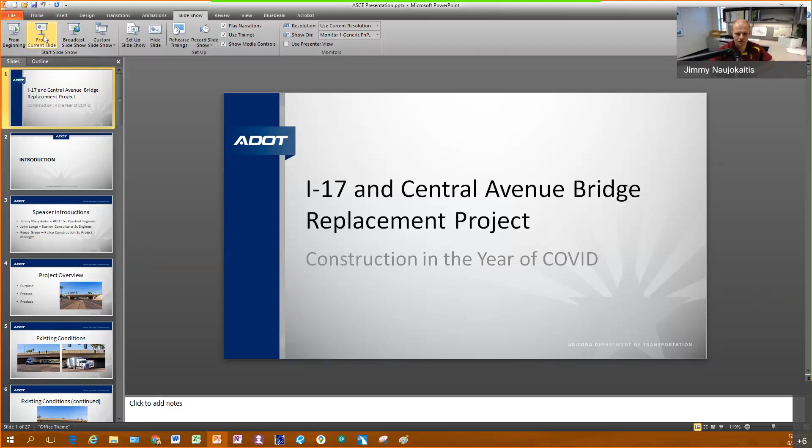Jimmy, I believe you should have screen sharing. All righty. All right, everyone see that? Yep. All righty. Now I got expectations that it's going to be a good presentation, like Joe said. Okay, well, at least for my part, I'll give it a shot. John and Reece won't have an issue.

So, yes, like we said, this presentation is about the I-17 and Central Avenue Bridge Replacement Project, and we're subtitling it Construction in the Year of COVID. So we'll explain that a little bit as we get further on into the presentation.

Kind of brief introduction. We already had our intros. So myself, Jimmy Naujokaitis, I'm senior resident engineer over here at the Black Canyon Field Office for ADOT. John Lange, he was the primary bridge designer for Stanley Consultants, and then Reece Green is the senior project manager for Pulice Construction on this project. You'll be hearing from them later in the presentation.

All right, so I'm just going to provide a brief, quick overview because I know you guys don't like owners droning on and on about their projects. And also John and Reece's stuff is far more interesting than what I've got to talk about. So real quick, the 3 Ps for this project, something I came up with late at night.

The purpose of this project is to replace this structure here, the existing I-17 and Central Avenue overpass, which was about 63 years old. So it's to replace that with a new, quote unquote, state-of-the-art bridge to not only facilitate traffic on I-17, but also to account for the future light rail expansion in the area.

The process is a phased bridge construction where we would demo and rebuild the bridge one half at a time. Because I didn't realize this, but apparently you can't shut down a major interstate freeway in a major metropolitan area for 8 months. But they told me that was not a good move to make. So I was like, okay, all right, I'll let you guys make the decision. Turned out very well. So glad they didn't have me consulting in that end at the beginning.

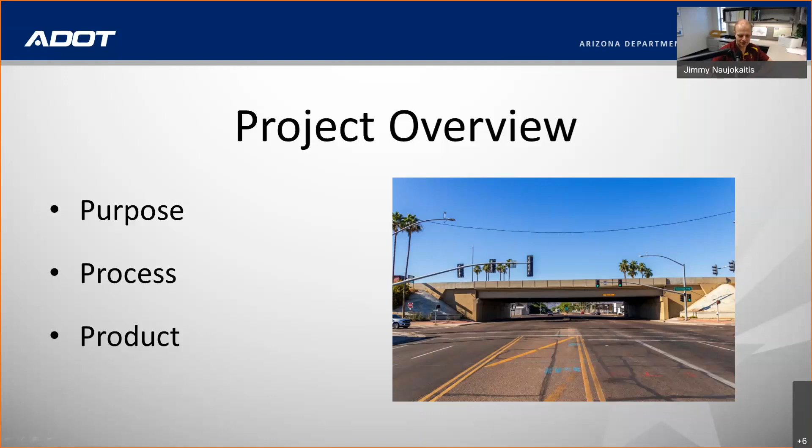And the product is, as you will see, a modern 3-span steel bridge over Central Avenue, allowing for maximized clearance underneath for both light rail and heavy truck traffic, as well as providing a conduit of traffic over Central Avenue for I-17. So I'm just going to kind of show some of the existing conditions.

One of the big things that we wanted to get away from, and one of the big reasons why we replaced this bridge is, as you can see, the 13-foot 11-inch clearance. This is one of the lowest clearance bridges, I believe, on the ADOT system.

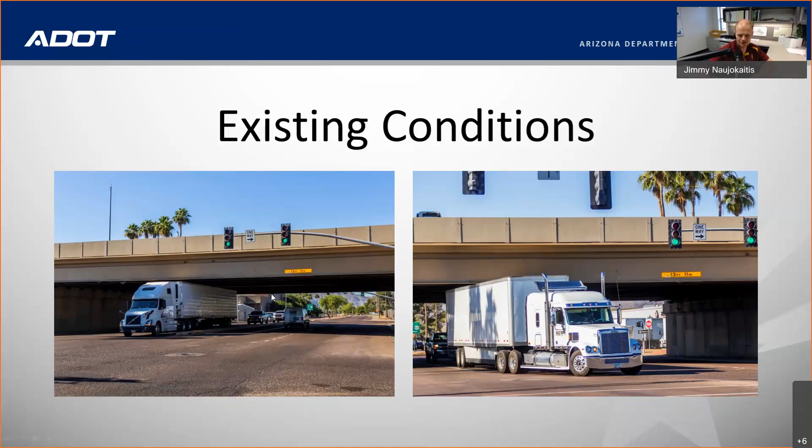A lot of the bridges along this corridor are fairly low clearance. I think 16th Street's about 14 feet. Either way, this was one of the lower ones, so we wanted to make sure, as you can see, the large truck traffic in the area, very low clearance. We had a bridge rehab project probably about 3 or 4 years ago to straighten out some of the girders in that area that had been hit, so it was an ongoing issue.

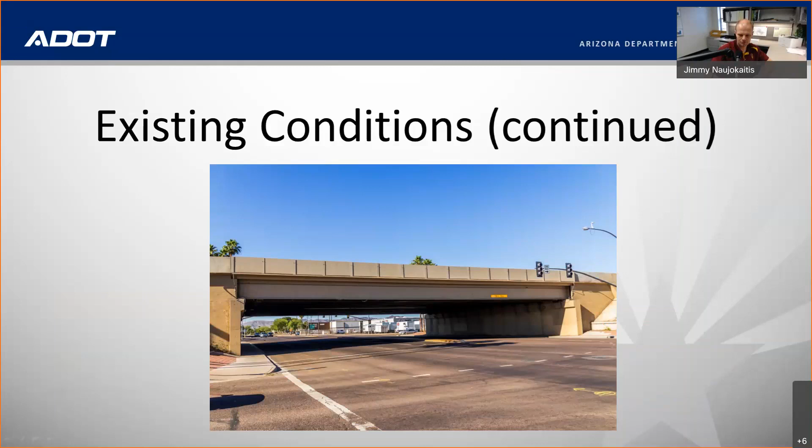You can see some more existing conditions. It was a single span bridge. John will get into that a little bit further in the presentation as to why this existing bridge was a single span, and why our current bridge has a single span across Central Avenue, but in the 3-span manner.

This is showing a little bit at the start of the construction, some of the initial phasing work that we were doing in the median.

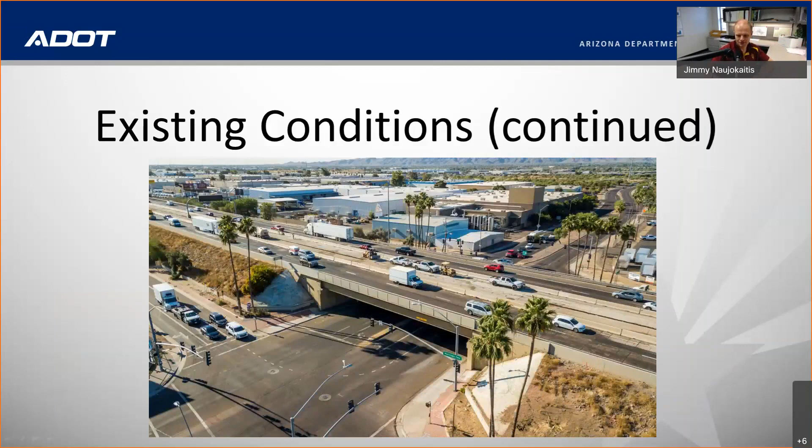As you can see, small footprint area, single span, low clearance on the bridge. That was one of the biggest reasons why we wanted to replace this bridge at this location.

Just really quick, for the project, the programmed amount was $20,440,000. Contract time was 565 days, and the contract was awarded to Pulice I believe in March of last year.

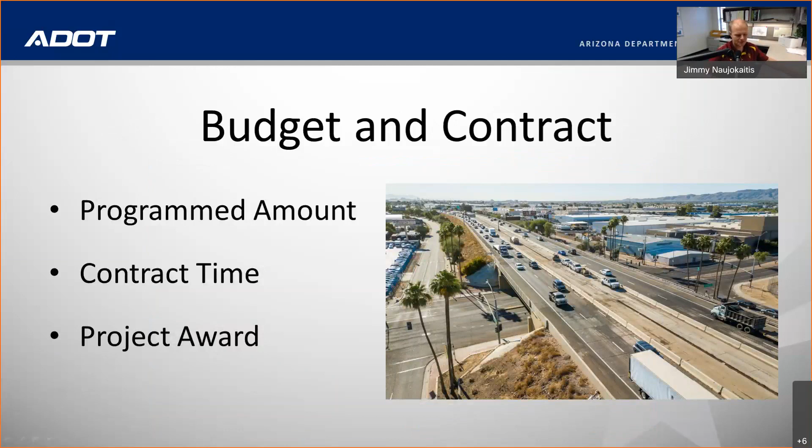All right, so that's the project development. I will hand this off to... stop sharing. Pardon me, I'm not too familiar with WebEx, but now I will attempt to pass this off to Mr. John Lange, and he will continue with the design side of this project.

It's a great thing, this whole thing is going to be captured on video, so I can see years from now how terrible my presenting skills were. But hopefully all my jokes landed. I can't hear any of you laughing, but I'm imagining you were all laughing hysterically. They were great. Let me see if I can get this going here.

All right, can you see my screen here? Yep, great picture. All right.

Like Jimmy said, I was the lead structural engineer for Stanley Consultants on this project. Just one second, let me see if I can get this. Okay, there we go.

Like Jimmy said, we had an existing single span bridge. This is a rendering of what the final product is to look like.

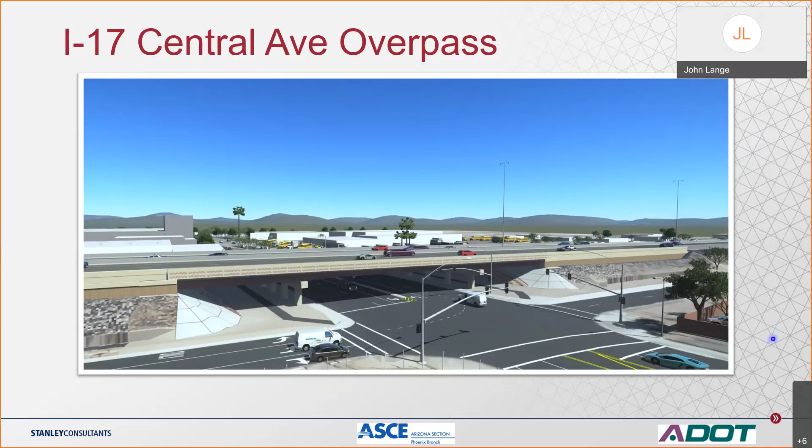When we started the project in phase 1, the DCR, it was based on the Maricopa Association of Governments I-10, I-17 corridor master plan, or spine study. I kind of refer to that as the wish list for I-17. It's the ultimate build out.

Close to the end of the DCR phase, the project was reduced to the auxiliary lane concept, and instead of the ultimate configuration, we're adding auxiliary lanes to each side of I-17, to account for future widening.

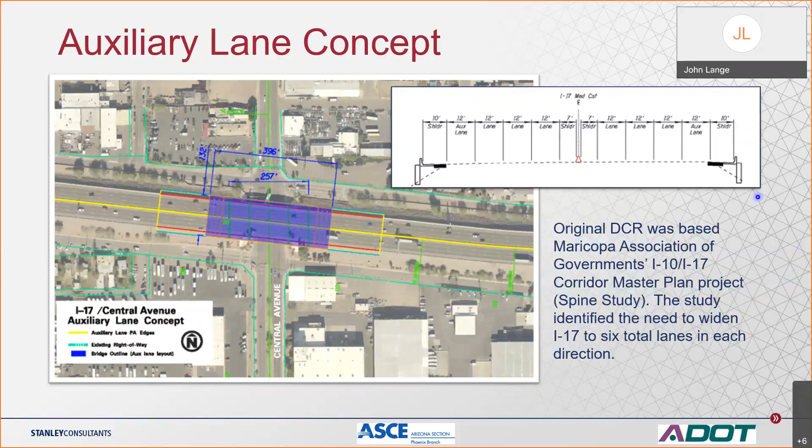Some of the project goals were to replace the existing aging I-17 Central Bridge. The bridge was fairly old, reaching the end of its lifespan. It had gone through a number of repairs and upgrades.

We needed to increase the vertical clearance, like Jimmy said. Valley Metro was planning to extend their south central light rail through this area soon, so that's why this project was moved up a little bit.

We needed to minimize the structure's depth. Like Jimmy said, the existing bridge was a single span, which resulted in a fairly deep structure depth, so we needed a bridge concept that minimized that. We also had a goal of improving the turning movements and sight distance for traffic along Central Avenue.

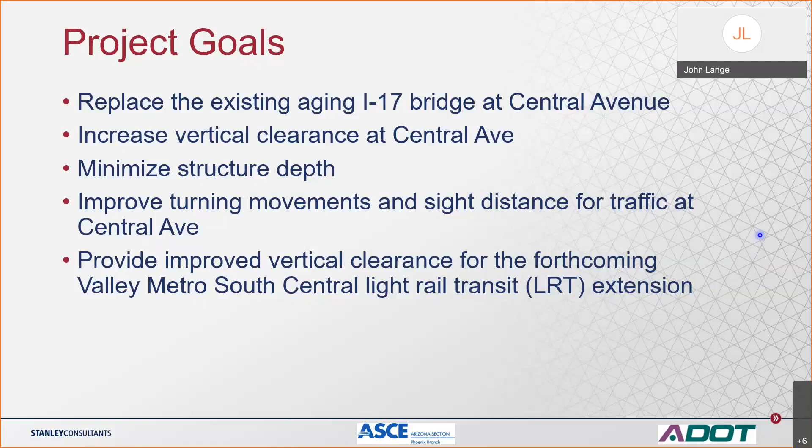This is just a graphic showing the extension for the Valley Metro Light Rail South Central extension. You can see our project location, and they are hoping to have their rail done through there by 2024.

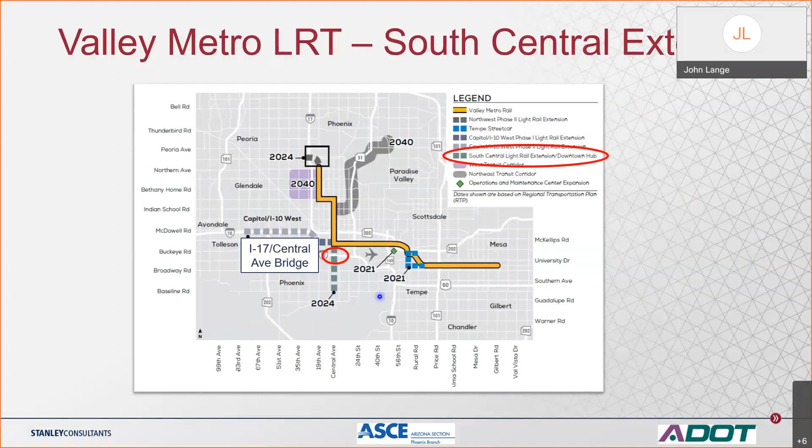The existing overpass, like Jimmy mentioned before, was about 60 years old, built in the early 1960s. It was originally independent northbound and southbound bridges, and the median infill was completed around the end of the 80s. It's a single span steel plate girder bridge, approximately 122 feet long by 113 feet wide.

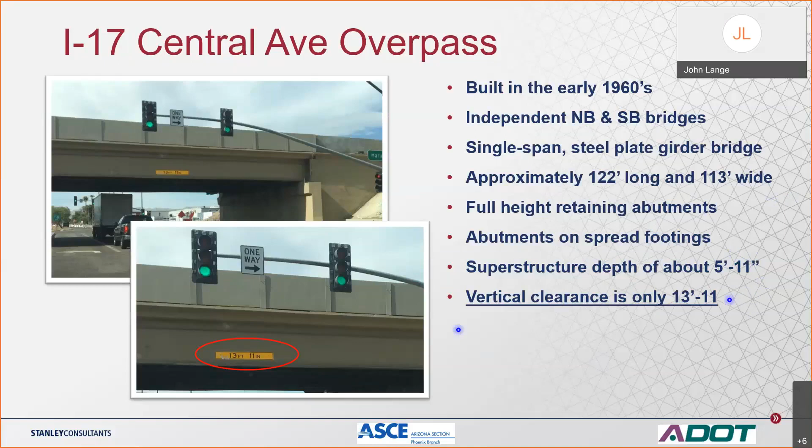It has full height retaining abutments, which proved to be a little challenging, especially for Pulice in constructing the new bridge. The abutments were on spread footings. The superstructure is about 6 feet deep, and the vertical clearance, a key issue here, was 13 feet 11.

Here's a couple photos of the existing underside of the bridge. You can see in this photo these are post-tensioning rods that were actually added to the bridge shortly after it was constructed to help improve its live load capacity.

This is the center or middle girder that was added for the median infill project. I don't know how well it shows up, but you can see it's slightly deeper here, with kind of a taper to it.

And these little birdies here remind me to point out that if you've ever driven under I-17, you know there's a pigeon problem. You can see some of the bird netting installed there, and that will be replaced on the new bridge.

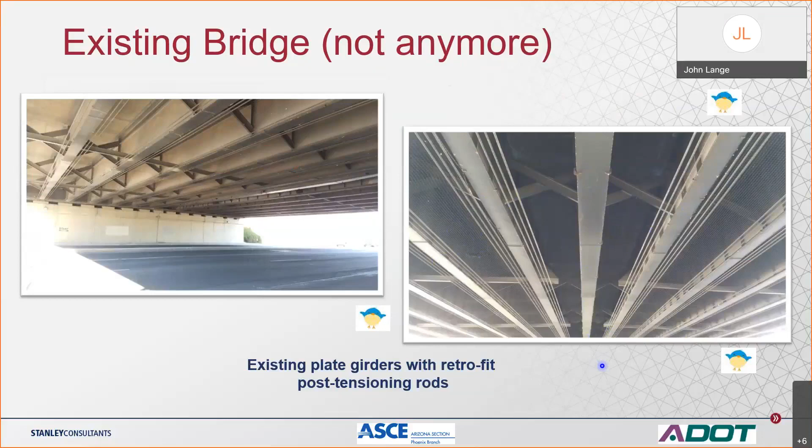And did we mention vertical clearance? I got a call or an email from Jimmy, I think it was middle of February, that the bridge had been hit, and the first thing that went through my mind was that it was the new bridge, but fortunately it was the old bridge, and the timing really couldn't have been better. This trailer hit the exterior girder and closed traffic there for a while, but fortunately the bridge was going to be removed within a couple of weeks, so it couldn't have come at a better time.

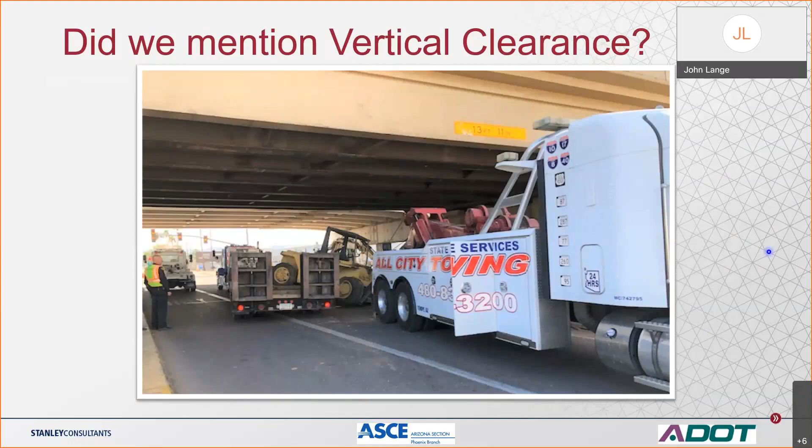Some of the challenges that the design went through: there are a number of existing utilities running down the center of Central Avenue, and that really affected the bridge type that we could replace the structure with. We had to maintain traffic on I-17 and Central Avenue at all times, other than short duration closures throughout the construction project.

We had to use phased construction in order to remove a portion of the bridge and then construct it, then remove the other half and construct it. So phased construction was essential here.

We needed to minimize any profile changes on I-17, because raising that profile just extended the project limits and made crossing over traffic much more difficult. We also needed to minimize impacts and avoid profile changes to Central Avenue.

And it's not really a challenge, but it was somewhat of an anomaly when we were designing the piers: there was one boring location that indicated some pretty soft soils.

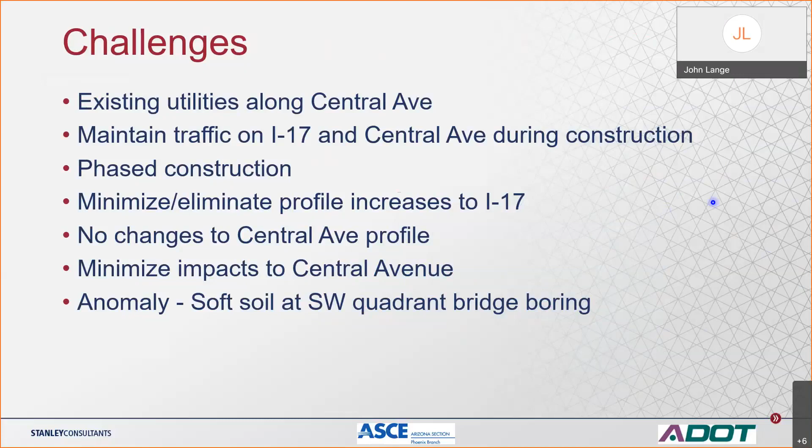Like I mentioned, there's a number of utilities within the Central Avenue roadway, and so we wanted to avoid doing anything within Central Avenue. One of the biggest surprises that I had during the project was this ADOT storm drain tunnel that runs down the middle of Central Avenue. Apparently there are three of them within Phoenix that were constructed during the completion of I-10 through Central Phoenix.

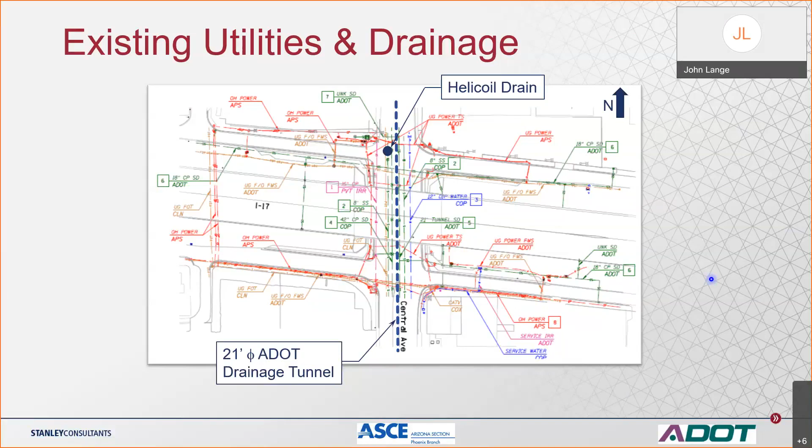This is a couple of photos of the storm drain tunnel. You can see that they used a tunnel boring machine, and the out-to-out diameter of the tunnels was about 21 feet. So we didn't want to do anything within Central Avenue and wind up causing any impacts or damage to that.

This is known as a helicoil down drain, and apparently they are used to slow the velocity and amount of debris of the storm water flowing into the tunnels. The tunnels collect storm water from about 44 square miles of downtown Phoenix and discharge it down to the Salt River.

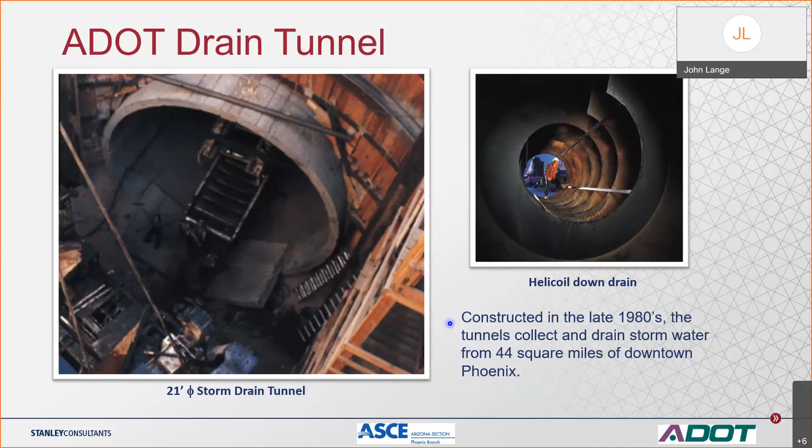Jimmy mentioned phasing is important on this project. This gives an example. We had to maintain two lanes of travel for I-17 in each direction.

Phase 1, we shifted traffic all the way to the northernmost portion of the existing bridge, so we, or Reese, could demolish and construct the southern portion. Then for phase 2, we shifted traffic to the newly constructed portion of the new bridge, so we, or Reese, could demolish the remaining portion of the existing bridge and construct the northern half.

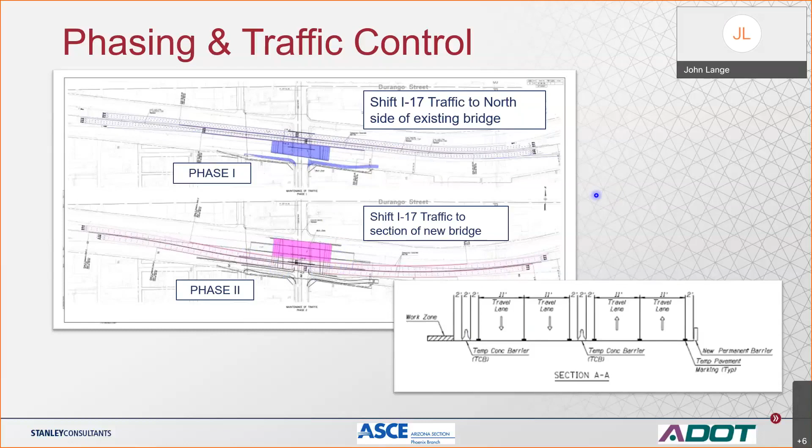This is just a slide from our DCR that shows the number of alternatives we looked at, and this isn't even all of them. I think there was a total of 11 or 12, but after everything, we came down to a continuous steel plate girder bridge that seemed to meet all of the criteria that we needed for the project.

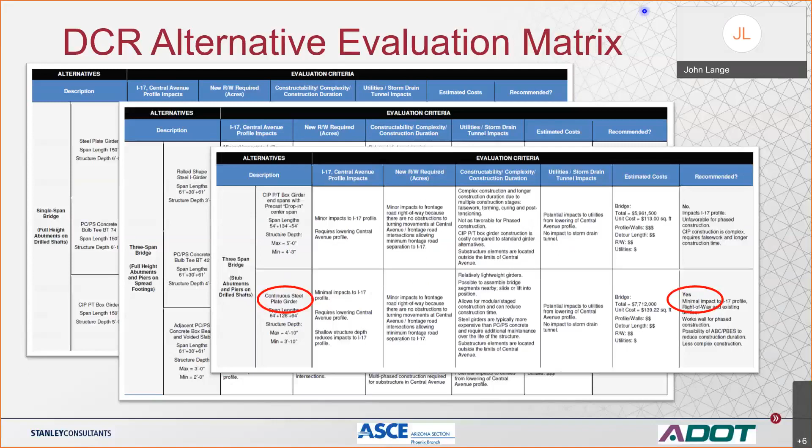Here's a few concept sketches of different bridges that we were looking at. The first two are a 2-span precast pre-stressed concrete girder and a 3-span precast pre-stressed concrete girder, which were really the direction that we had started down, because they met the criteria of minimizing impacts to I-17.

However, the problem here was that one of our goals was to stay out of Central Avenue and improve turning movements, so constructing foundations within Central Avenue was not a good idea. And through numerous meetings with Valley Metro, they didn't really like the idea of having substructure or columns to deal with and to have their trains run between and around them.

So this is the configuration that we came up with. The substructure elements are held outside of the Central Avenue cross section, and we minimize our structure depth to minimize any impacts to I-17, and we stay out of Central Avenue, so we don't need any excavations. We'll leave that up to light rail.

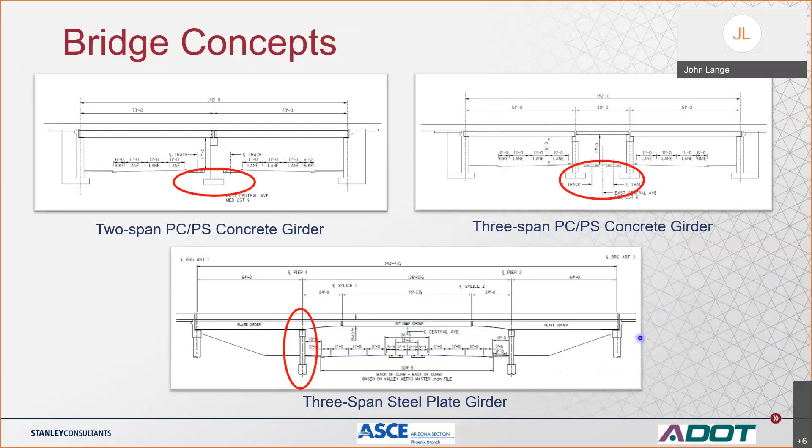This is the bridge layout that we finalized. We have a 256 feet long bridge, 3 spans, 64, 128, and 64. The center drop-in span between the field splices is about 80 feet.

Some of the goals, like we mentioned, was phase construction, staying out of Central Avenue. So the plate girder or steel girder bridge was advantageous because it could be constructed in pieces. In theory, you could erect span 1 and span 2 girders without affecting traffic in the middle, then come back and drop this section in. I don't think that worked out exactly that way, but that was the thought.

Here we can count on the end spans because of the continuity over the pier, and the steel allows us to vary the shape of the girder to help reduce the structure depth over Central Avenue and give us the vertical clearance we needed. When the bridge is done, we should have about 16 feet of vertical clearance, and when the light rail project comes through, they will lower Central Avenue a foot or more to provide the 17-foot plus vertical clearance they need for their catenary and electrical.

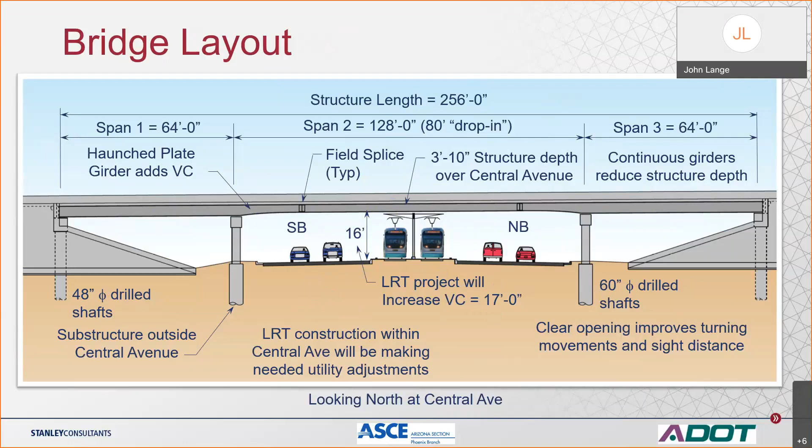One of the things was that in Phoenix and in Arizona in general, steel bridges are really uncommon, and I was really surprised when all was said and done that we actually wound up designing a steel bridge.

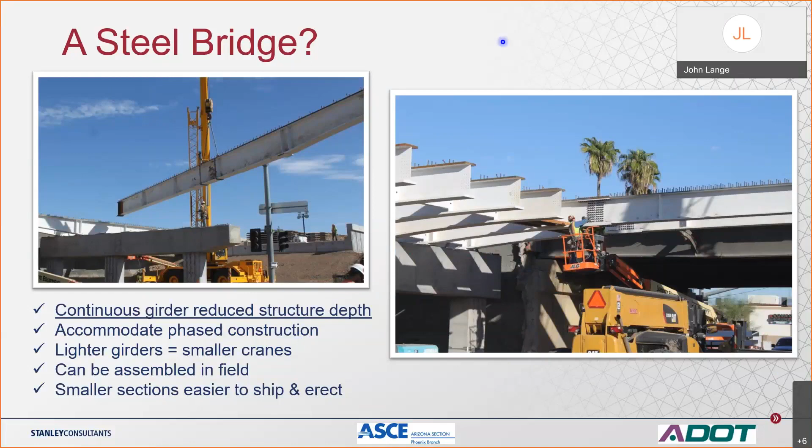But in our case, it has definite advantages. Like I mentioned before, the continuous girder helps us reduce the structure depth. It provided for phase construction. The lighter girders equated to smaller cranes. You assemble them in pieces, so you can have smaller sections for shipping and erection. So the steel girder really worked out well for this project.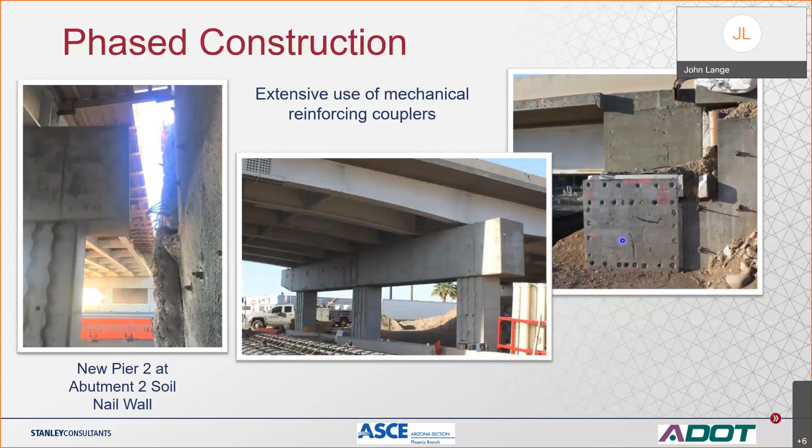That resulted in extensive use of mechanical couplers because of the tight, narrow distances here. We couldn't develop our reinforcing lap lengths between phase 1 and phase 2, or up in the deck. So wherever we had a construction joint, we had mechanical couplers. So when the contractors are ready to build the next phase, they'll come in and thread in the bars and provide us with the necessary lap lengths.

I mentioned an anomaly with the substructure. This is just a screenshot from one of our bridge models. Brian Davis designed our piers, and there was something really strange with this one pile, or drilled shaft, at the south end of Pier 1. All of the other drilled shafts within the piers were able to be about 46 feet, I believe, but this one had to be a little bit deeper.

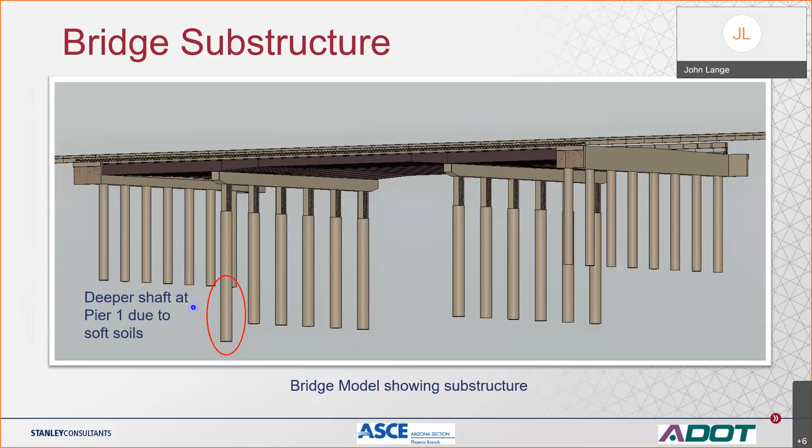Brian and Keith Dolan at Ethos did a lot of working together, investigating and talking with ADOT. What I think they found out was that the boring they did for the bridge was close to one of the borings done for the storm drain tunnel. So the backfill and whatnot kind of affected the boring and gave us lower capacities, which resulted in that shaft needing to be deeper.

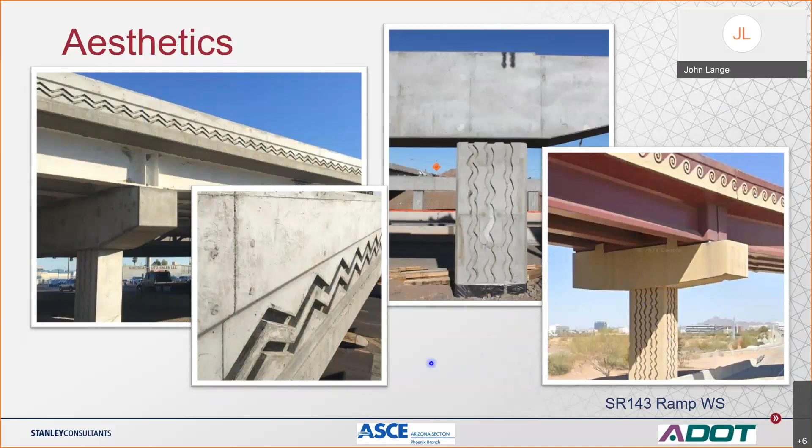The bridge went through a lot of aesthetic consideration. You can see some pictures of the aesthetics during construction. I didn't have anything other than renderings showing the colors, but I'm pretty sure the color of the girders and the rustication aesthetic pattern is similar to the SR-143. I think Joe Salazar named this Hohokam Pottery Red, something like that. So that's what the steel girder will be painted.

I try not to stick a bunch of information into slides, but bear with me on this one. This is just the bridge information. The bridge is 256 feet long, 134 foot 10 wide, so about 34,500 square feet. There are 16 girder lines, erected 7 in phase 1, 9 in phase 2, for a total of 48 girder pieces with 32 field splices, which equates to lots and lots of bolts.

I remember talking to one of the guys out there on a site visit, and they just kind of shook their heads at all the bolts. Girders are spaced about 8'6". The structure depth varies from 4 foot to 3'7", minimizing the structure depth over Central Avenue. We have stub abutments with 8 drilled shafts, each 48 inches in diameter, 40 feet long. Each pier has 6 columns, supported on 60-inch drilled shafts, except for that first column. For this project we used MSE walls, about 220 feet long each, for about 8,600 square feet.

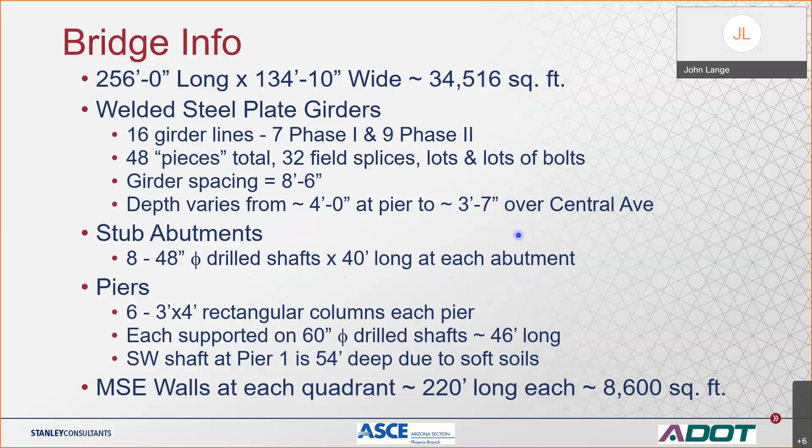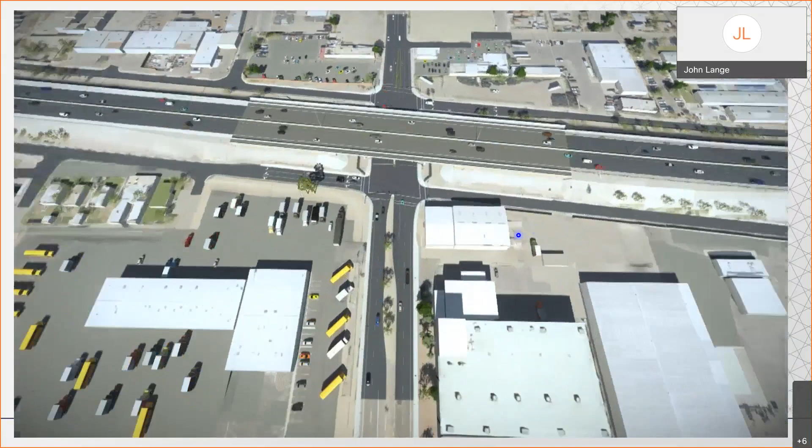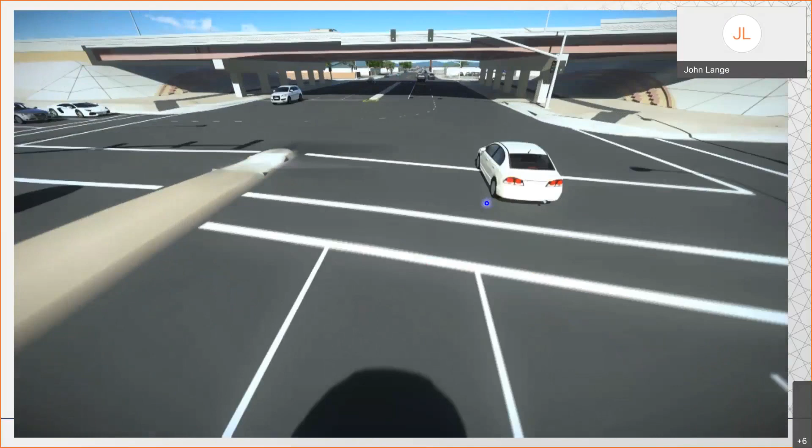This is just a short video fly-through that Nick Dorsey did. He's really a genius at this stuff. So we're traveling north on Central Avenue. This is before the construction of light rail. You can kind of see some of the aesthetic patterns, but it kind of gives you an idea of what the bridge looked like afterwards.

This is just an acknowledgement of all the people at Stanley that worked on the project, and our sub-consultants, Ethos for geotechnical and Aztec for maintenance of traffic, aesthetics, and utilities.

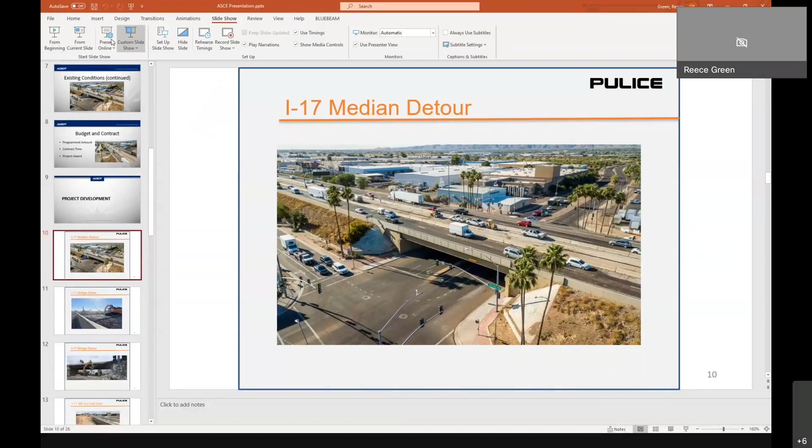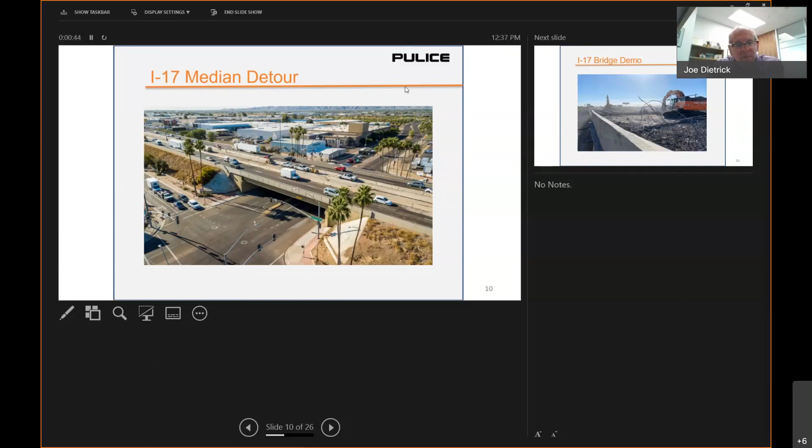And now let me figure out how to turn that over to Reece here. All right, I think got it? Yeah, let me get this. Okay, I think we're live, right? You guys see that? Not yet. Right, yeah. There we go. Okay, is it in present mode? Not yet, if you start the slideshow it should. That's the presenter view, Reece, I think. In share mode I can't see it whenever I present, so give me a little feedback. Are you seeing the full view or not the full view? Oh, we're not seeing the full view. It says you're on slide 10. How about that? That's good. Okay.

So, Reece Green, project manager for Pulice Construction. Like John said and Jimmy said, it was phased construction, and right out the gate we were awarded in February, March, and construction started in April. With it being phased construction, our first order of business was to establish a median work zone so we could move forward with median removals. If you recall, the majority of I-17 has a 32-inch roadway barrier with expanded mesh glare screen which is old and in bad shape. So we established the median work zone. You can see our removal crews and temporary paving crews in the median with our work zone established. That allowed us to cross traffic over and put traffic in the existing northbound lanes, stacked 2 and 2 in both directions with a piece of barrier running down the middle to delineate traffic.

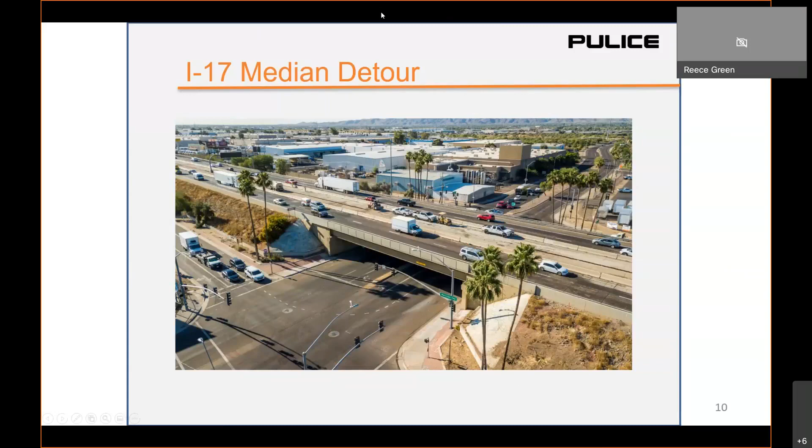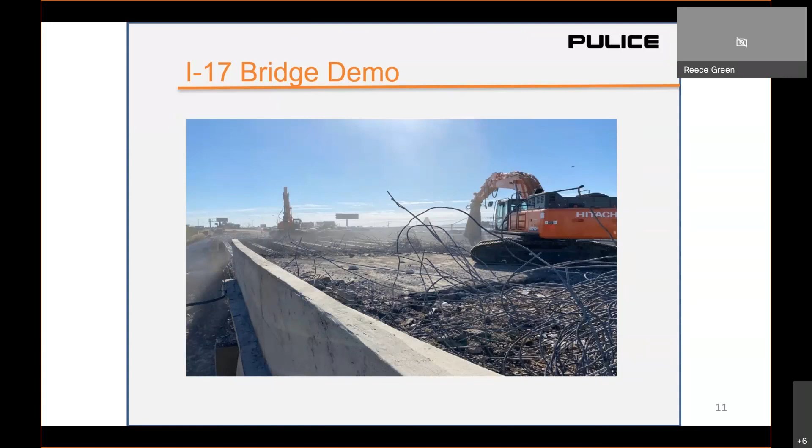Once we established our work zone and got traffic switched over, we started simultaneously working two aspects of it. He smartly pointed out we had to shore the existing traffic we had moved over to one side in order to remove the bridge as it got longer and wider. So we got the majority of the shoring soil nail wall lifts in prior to the deck removal, but we had to find a stopping point because once you peel the concrete deck off and sort the rebar, you have to be able to hoist your structural steel members up on the bridge to get them out of the way - there just wasn't enough laydown area because of the amount of traffic crossing Central Ave. So over the course of a weekend, we closed down the intersection, knocked off the concrete deck, sorted the bar, cut all the intermediate diaphragms with heavy duty shears, and hoisted the existing steel members up on top of the abutment.

We did this because we had to abate these girders to find a cut point to be able to put them on a 40-foot float and haul those to the recycler. So like I said, there just wasn't enough room on the bottom.

So this was the phasing inside of the phase construction. You can see up in the top left of that picture the first two nails on that west side abutment. You can see part of the abutment being removed.

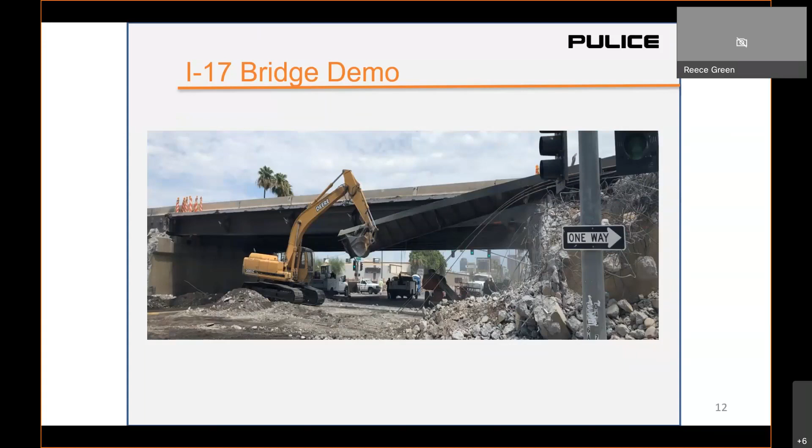It was imperative and required to get that shoring in prior to taking down the existing abutment and extending that excavation. But we still had to keep it high enough for a piece of equipment to grab in tandem and hoist that structural steel member up on the abutment for abatement, cut it, and transport it off the job. The demo was over the course of a marathon weekend, as is most of our work that requires full closures.

Here's another view of the nails. The design ended up being about a 21-foot nail. They were spaced 4 and 4 up and down. We had 4 lifts for that installation. You can see there's about a 2-foot shy distance between our barrier up there protecting traffic from our work zone.

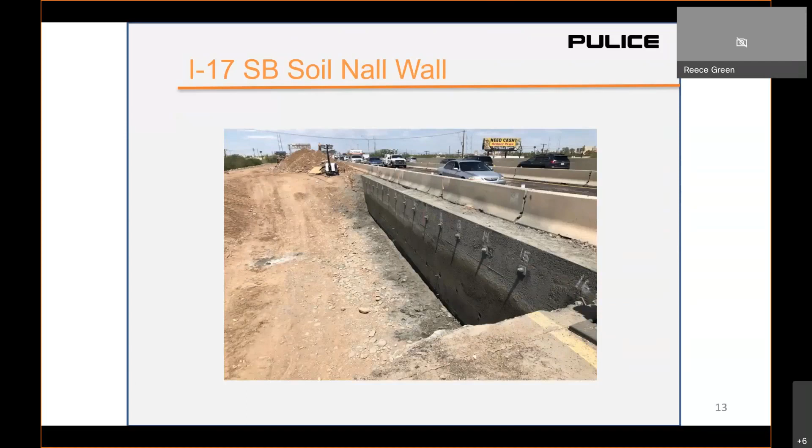Our procurement team, our estimating team smartly cast a bigger net for drill shaft foundations. We know from experience working in SGC that there's 2 ways: temporarily casing the hole, or the alternative is an open flighted auger with a polymer slurry. The issue with the polymer slurry is there's a train of equipment that comes along with batching the polymer and then advancing the casing, keeping that hole full of drilling fluid to keep it from caving.

And there just wasn't a lot of real estate down on Central Ave. We were fortunate enough to partner with the city of Phoenix and ADOT and grab an extra lane down in the bottom, which just helped us with lay down, with drill shaft cages and what have you.

As far as the construction, the abutments were developed in the abutment cap, so there was no transition cap like at the piers. But to limit the amount of equipment required to install these foundations, we were able to do it with the casing rig. So there was some casing laid down, but we didn't need 4 or 5 Baker tanks out there with polymer slurry and a settling tank and a fresh water tank. So that really helped with ingress egress to the site, especially on Central, which is very crowded.

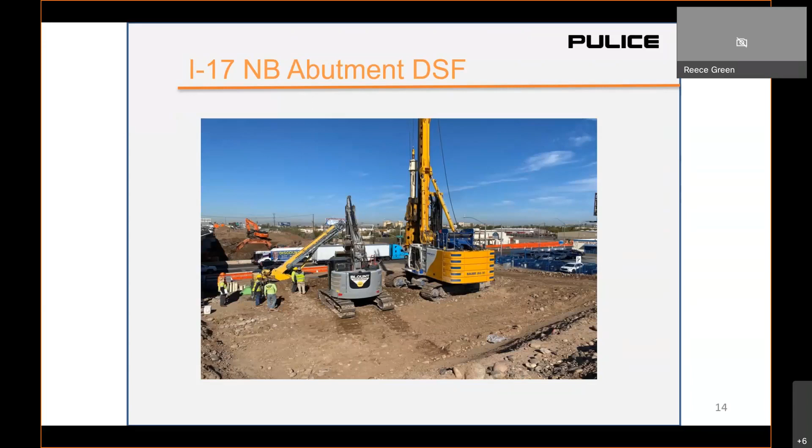So here's a good example, this is the phase 2 installation of the abutment drill shafts provided by Blunt Contracting. You can see abutment 2 on southbound. This was about a month and a half ago. You can see caps on there. We have our form work up. We're waiting for reinforcing steel on abutment 2, ready for iron.

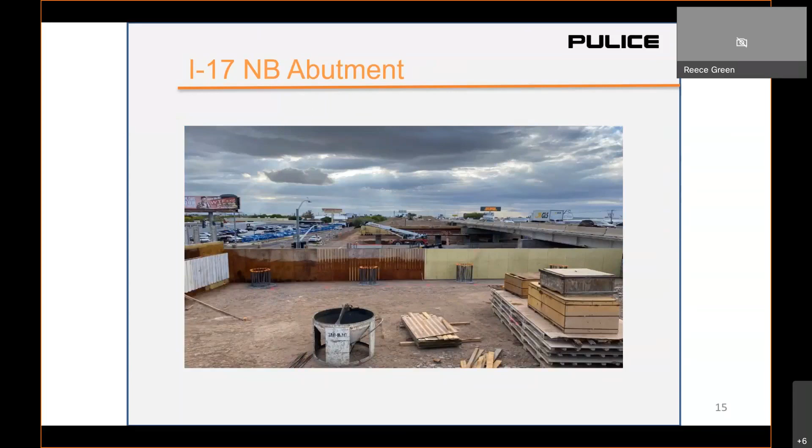Because of the splice connections, it was imperative that we get span 1 installed and framed up with diaphragms, and now your line and grade is locked in. Everything else had to go in sequentially, just because of the amount of slack from the bolts and the holes.

There wasn't a lot of slack, and considering the magnitude of the connections, we had to do it that way because it would have been too much of an effort to set that adjacent span, or that opposite span 3, and then fly in that center section. If there was any movement, we would have had to go back and pick it up.

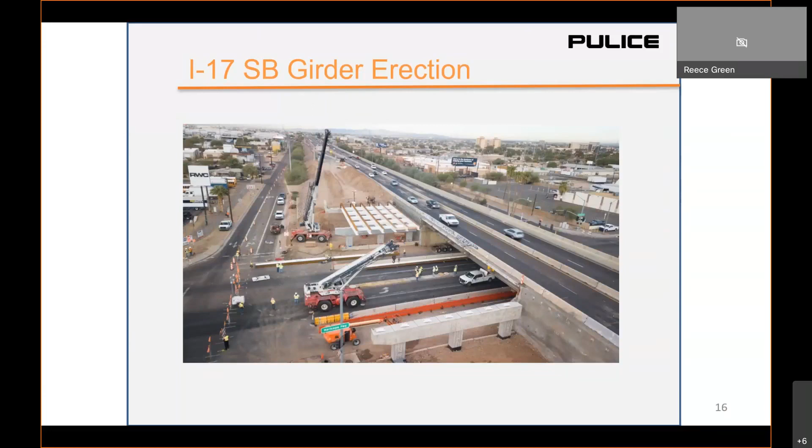So the order of erection was your initial span, you'd fly in and rack a couple of bolts to get your connection, and then you could fly in that 3rd span, which you'll see in this view. You can see your initial span on the far side, and then 2 cranes hooked up in tandem. The heaviest pick were your abutment-to-pier spans that had the cantilever on there. They were right at 35,000 pounds with rigging.

And then your center section was a little lighter, a little longer, but a shorter cross section. And it was right at 20-something thousand pounds.

Like John mentioned, there were a ton of bolts. I did John a favor and didn't tell anybody he was a designer when he was out there, so he could avoid a lot of dirty looks. But there were, I want to say, 220 bolted connections per splice, and there were 30-something splice connections, which came out to right under 7,000 bolted connections at the splice locations. When you add up all the steel diaphragms, there's over 7,000 connections. So this takes some time. They're all torqued in the 650 foot-pound range.

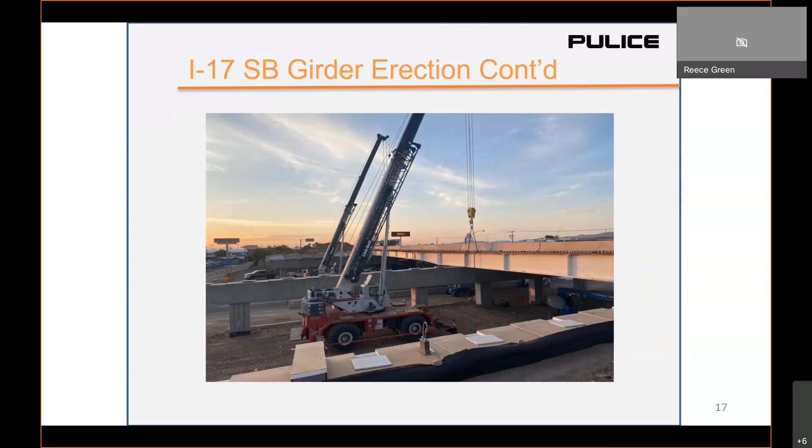There's definitely been a lot of effort on there. One thing I did want to add about the steel management is these plate girders came from a vendor, a developer in Oklahoma City. Myself, the project engineer, and one of our structure superintendents flew out there in October, about a month before they shipped, and they had most of them mocked up. It was another secondary quality assurance check on how we were going to ship these out, here's our sequence, and everything was set.

Literally the day after the first 6 or 7 girder lines came out, the Panhandle had a huge freeze and it knocked a lot of their power out. Their logistics officer lost all communication with the transport drivers, which they had hired locally. So we were literally using every means of communication with the manufacturer to track down these individual truck drivers who had to pick a different route to get here to Phoenix, and they got out of whack.

So Zach spent a tireless week organizing the drivers to come in at certain times and getting them staged. The hardware came on rail, the girders came on truck, so everything was scattered between here and Oklahoma City. It was a pretty long week getting them organized, but once I got here we got them organized and it went up. We were able to hang the first span during the week at night, and then over a long weekend we got the majority of span 2 and 3 in, and a couple of nights we hung the remaining girder line. So it went pretty good.

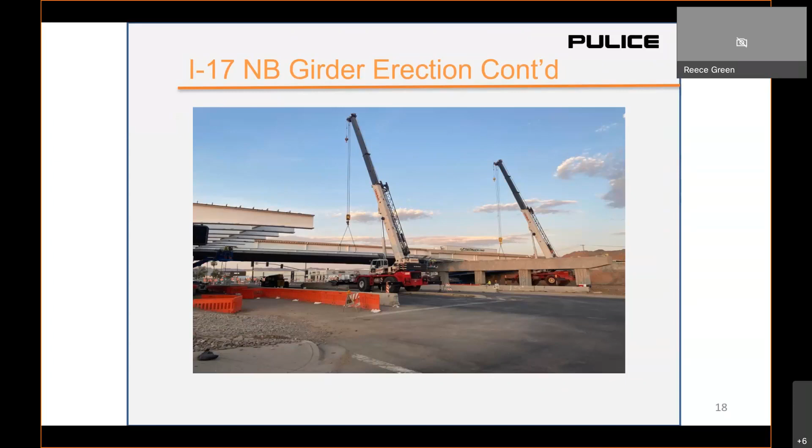Challenges are normal, there's always something. Once we got a deck on it, we decked it, and here was our first deck placement. This is southbound. Start early, finish early, no issues with the deck placement. Came out really good, right and smooth.

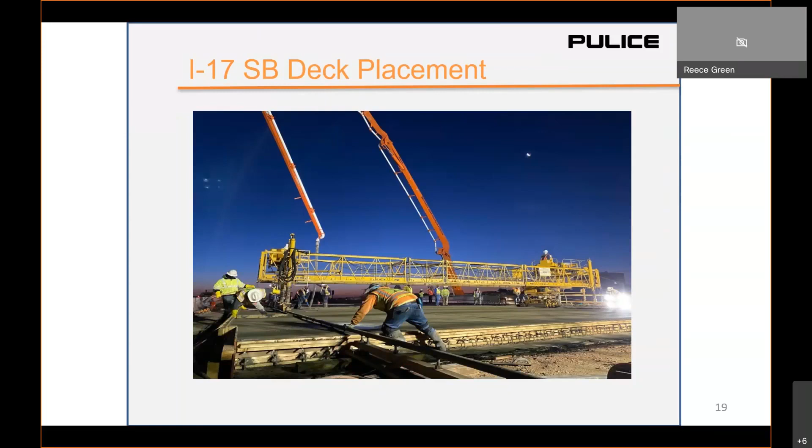Current status: we just concluded northbound erection about a week and a half ago. We're still, I think we blocked in our last diaphragm this week, and we're in decking mode right now. We got caps hung, and that deck placement is scheduled for the end of this month. So we're tracking well from a schedule perspective.

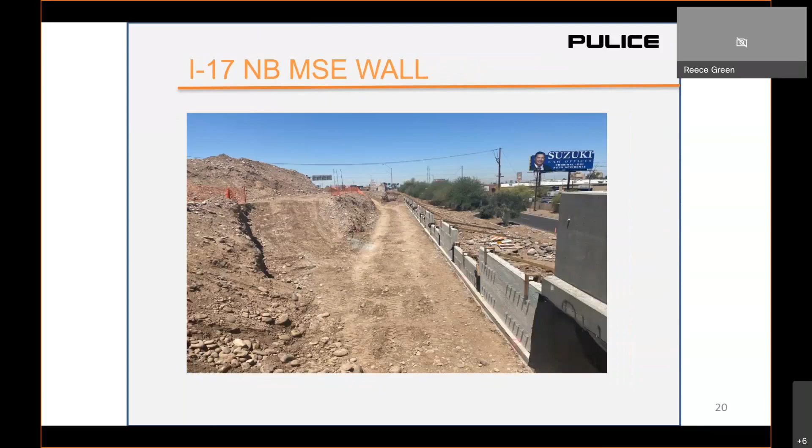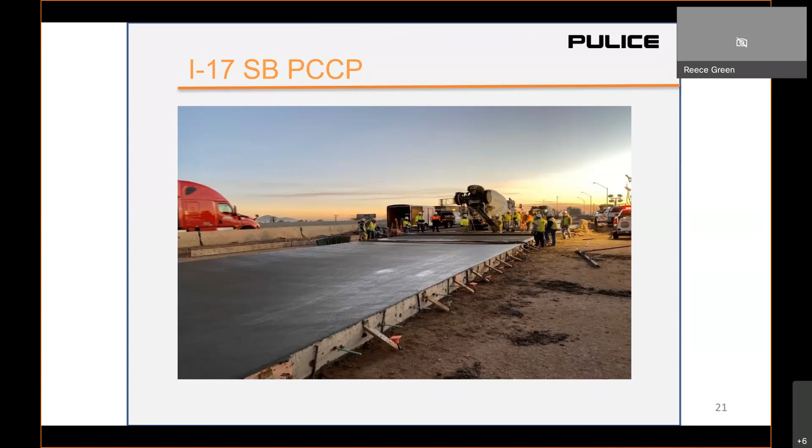We got a new watershed area we're tying into. It's got a new drainage feature up on the main line that we chase down to an existing system down there on the frontage road. That's generally the sequence of events and kind of where we're at with construction.

You know what, John flashed a slide of his team. It takes a lot of people to get these off the ground.

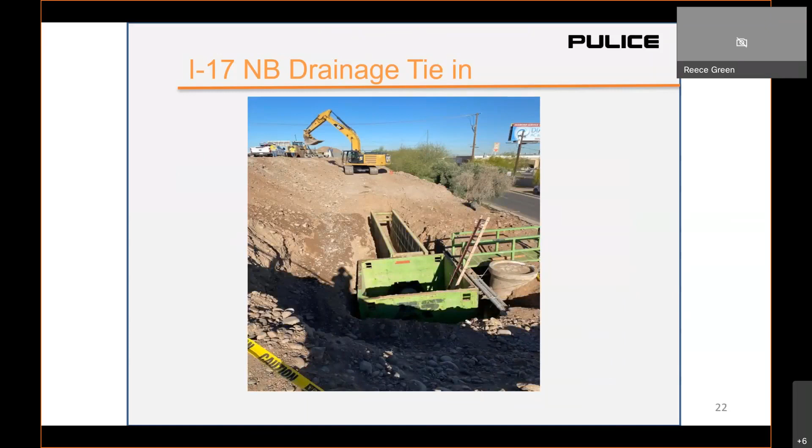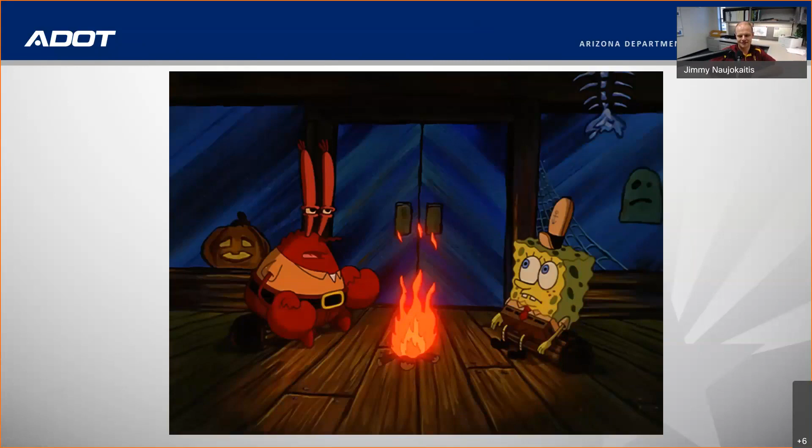This is incredible, just talking about the design and the reasoning for... get rid of this meme because now that's recorded forever online somewhere. But he was talking about the design considerations with the original design and why those PT strands were put in. So it was a good lesson learned with that.

Going forward, make sure that all the structural members are... not to say they weren't accounted for, but it actually turned out that some of those PT strands hadn't been tensioned anyway, and we're probably fine. But spur of the moment kind of thing, we've got a bridge, we want to keep the other half up after the weekend.

We don't want anything to have any issues with that going forward. So we made a call, ended up being, I believe, the right one. My boss said it was the right one, so I guess that's all that matters, right? And we were able to move on with the project, and the bridge demo continued as originally planned.

One of the other things that rolls into that is maintaining project focus, but also seeing the larger picture, wanting to make sure we had the best interest of the project in mind. That's one instance, but we're doing some other things, adding a little bit of additional work onto the project, looking at the long-term maintenance of this corridor and our infrastructure, keeping that in mind, but also seeing the larger picture.

One of the other things that may not have been mentioned is that if you drive down Central Avenue, you'll see Valley Metro Light Rail construction going on right outside of our project limits. So with the team we've got, being able to adapt to change, getting all the players in the room, we've been able to meet with Valley Metro on a number of occasions and allow them to work concurrently, or sometimes non-concurrently, in our project area to facilitate their project construction and keep on their project schedule.

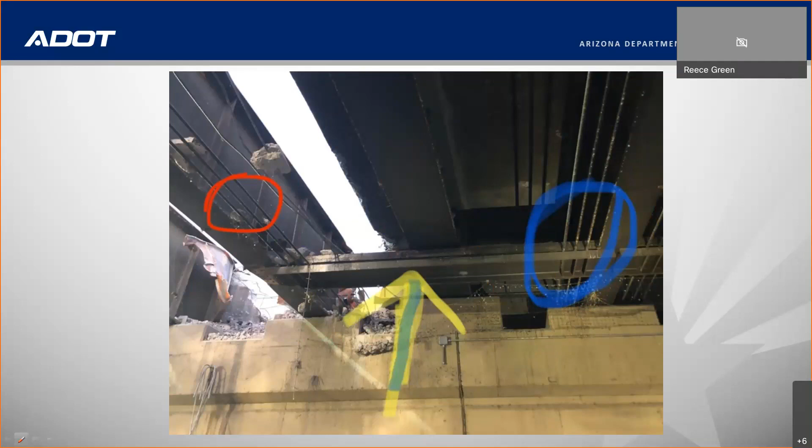And from that point, we were on a group text thread where we could share progress of how we were doing and small talk amongst the team. So that definitely paved the way. And as Jimmy said, we do have a relaxed relationship between meeting the quality and requirements, but having fun with it too.

COVID was a son of a bitch. It's still a son of a bitch. As engineers and managers, we're tasked with managing resources, and our most precious resource are the people that put work in place. We're tasked with bringing a project home on time and on budget and keeping safety at the highest priority. COVID added a significant wrinkle into what we're tasked with - it was a different dimension.

The personnel we have in the field putting work in place don't have the luxury of working from home. They have to show up, punch in and punch out every day, but we understand we're challenged with the same things they are - young children at home, schools closed down, one parent becoming a homeschooler. So we have to look at our resources and maintain progress on the schedule. We've been able to deal with that through shifting resources and accommodating all the challenges our team members at the project level have had.

I'm really proud our entire team has been able to come out of that, and like Jimmy said, it's been a minor impact. It's kind of been annoying, but in terms of project impact, it hasn't been significant - hey, we're delayed 60, 90, 120 days? No, we're going to finish on time, and hats off. A lot of that has to do with being able to work quickly with John and Jimmy and the rest of our teams on challenges. I've appreciated it - it's been a great project. We're on the downhill stretch now, but it's been a pleasure to work with everybody, and everybody's done really good.